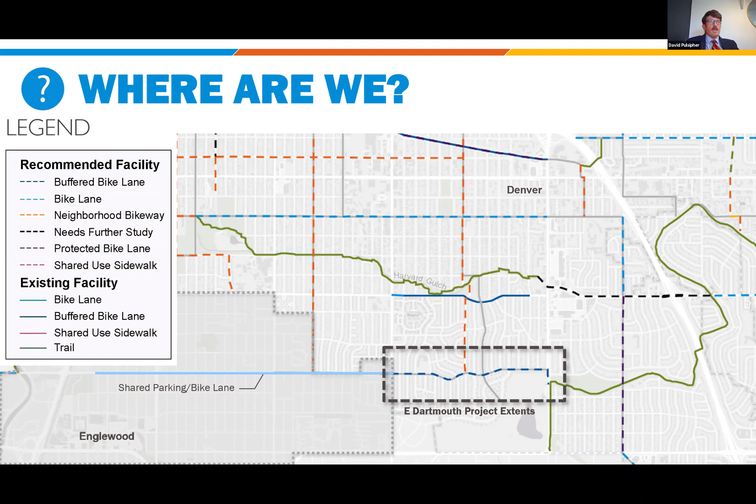Just want to give a little background to where did this project come from. Going back almost 10 years now, this stretch of road was first identified in 2011 in our citywide bicycle master plan effort, Denver Moves Bikes. It was then reconfirmed in 2015 when we did an update to Denver Moves Bicycles. And then some of you hopefully participated in our 3-year comprehensive planning effort called Denveright. In Blueprint Denver, Dartmouth Avenue was confirmed as a bicycle priority corridor. Blueprint Denver is the city's land use and transportation master plan, which was adopted by City Council. And now it is an opportunity to move from just talk to actually something on the ground, with our street maintenance team scheduling Dartmouth to be repaved. Now is the opportunity to design it, to improve it, and make it work better for the city.

A little more background in terms of that's the planning history, and this is how a project becomes an actual design and then implemented. So we've already met and done a lot of planning. We've looked at the data and analysis, and we will walk you through that. We've selected a bikeway type, and now we are refining it and being accountable. Many of you may be wondering why are we here? We met with you guys in February and asked what you think. It's our intent to be accountable, to show you how we listened and how we incorporated your feedback into the final design.

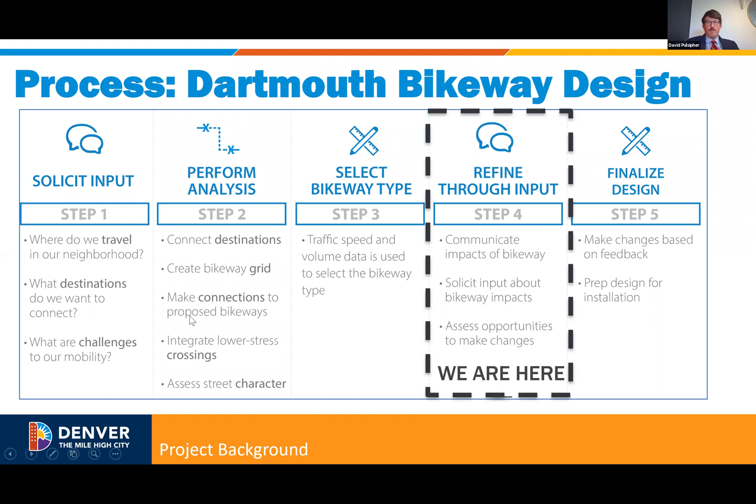So Ashley, this is you. It might help if I unmute myself. Oh, first flub. All right.

With that, we're going to take a quick break and ask you guys a quick polling question just to make sure we're all awake. Outreach is also an ever-evolving field, especially this day and age. So we just want to know what is the most effective way to communicate to you about projects. What was the most effective piece of information you received about this meeting? Was it via flyer? Was it from a neighbor? Did you read about it online? Did you see a yard sign? Or did you hear about it from your council office or your neighborhood organization? Give everyone just a few moments to fill that out.

All right, let's see what the results are. So it looks like, well, not surprising, the majority of folks, 36%, heard about it from their council office or neighborhood organization. I think that's definitely a reflection of how involved both the neighborhood organization and council office, Councilwoman Black, are in this community. So awesome, thank you, that is very helpful, as are the other notes on that. So with that, back to you, David.

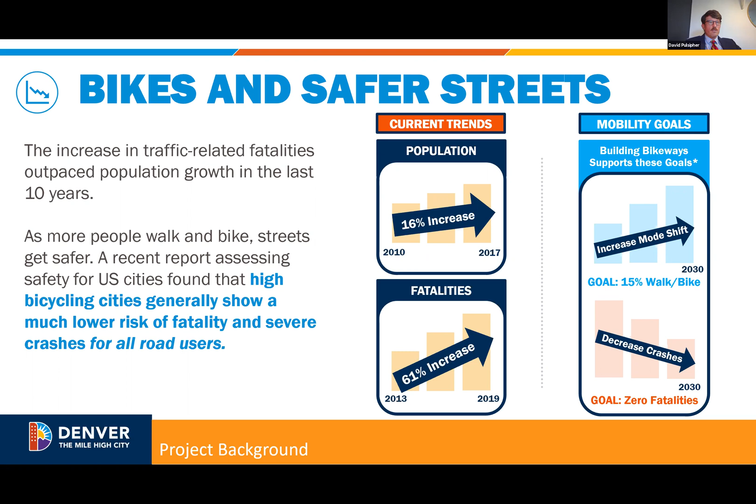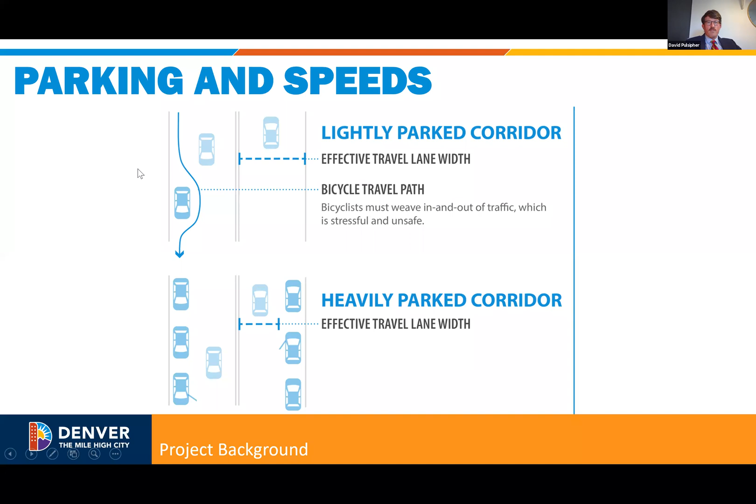So there's a relationship between the design of a road and fatalities and injuries. A good way to think about this is when you're driving on I-25, you may notice the lanes are really wide, and that's to accommodate higher speeds. When you have wider lanes, it accommodates people going faster. In a heavily parked area, that can effectively reduce the width of the lane, but on an infrequently parked road, it makes the lanes operate wider, turning what's intended to be a narrow roadway into a very wide one, which is conducive to speeding. Increased speeds result in increased likelihood of fatalities and injuries to vulnerable road users. So there's definitely a connection between roadway design and safety.

You may have heard about a buffered bike lane, which is the proposed idea. What Denver is trying to do is get more people to ride their bike and make it possible for more people to do so. This data was pushed out by DRCOG, the Denver Regional Council of Governments, who did a statistically valid survey of people living in the Denver metro area. They found that nearly two-thirds of people want to ride their bike and want that opportunity, but don't feel safe doing so presently. When you do things like a normal bike lane or a shared lane marking, you're encouraging people who are already riding to have more mobility. What we're trying to do is design a network that encourages the people who aren't comfortable now, the majority of Denver, to be able to ride their bike.

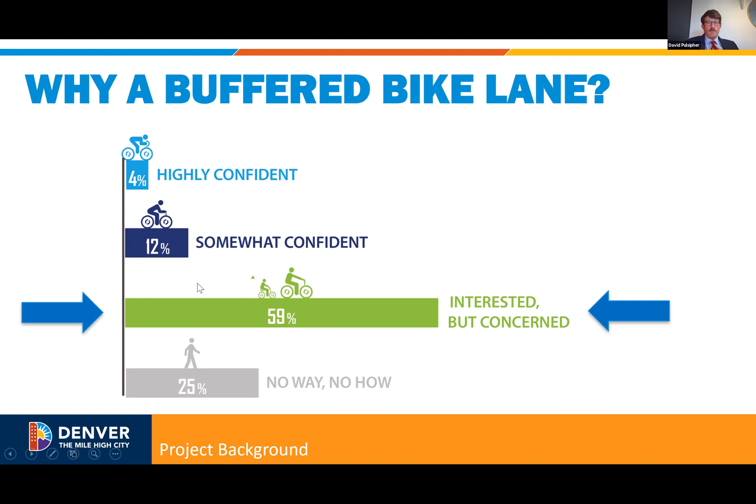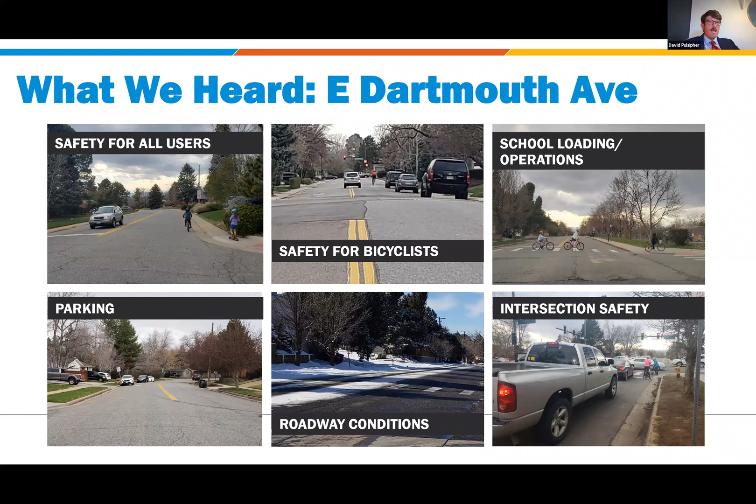So now we're going to talk about how what you said impacted the final design and what we're showing you this evening. This is Bryce—I'm going to hand it over to Bryce, our design lead and transportation engineer at DOTI Engineering. Thank you, David, and hello everyone, thank you for joining us tonight. As David said, my name is Bryce Hammerton. I'm the engineering lead for this project, and I wanted to discuss some of the data and design.

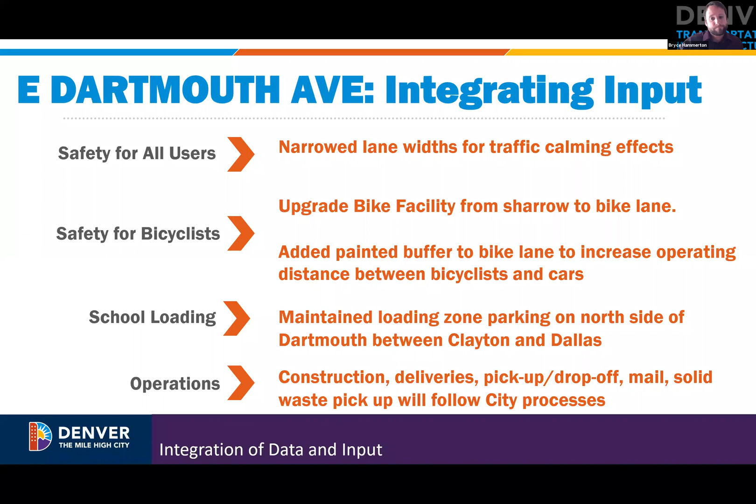Public on-street parking utilization is very low, as we have been told and as the data shows. So we will be removing parking from the street. However, we will work with the community to identify remaining street parking available in the neighborhood.

Roadway conditions: street resurfacing will improve the pavement quality. Intersection safety, particularly at Colorado, will have improved marking and signage to better direct vehicle traffic and bicycle traffic.

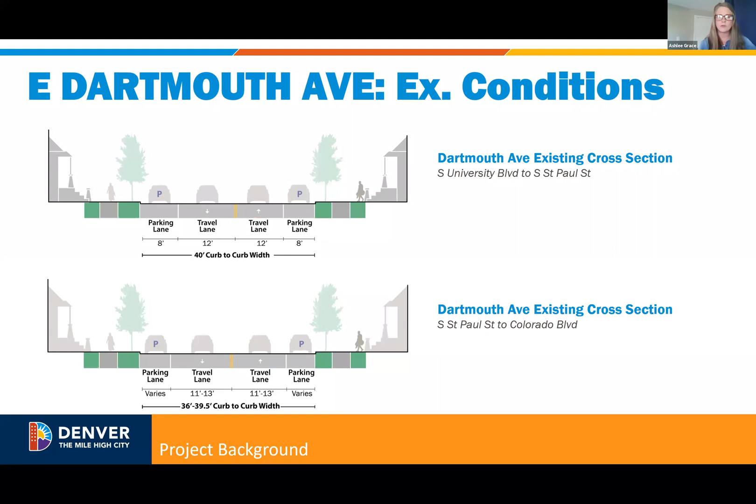Yes, it is measured speeds, not posted speeds. That may surprise some people based on what you feel traffic is, but as the data shows, it is right around 25 miles per hour.

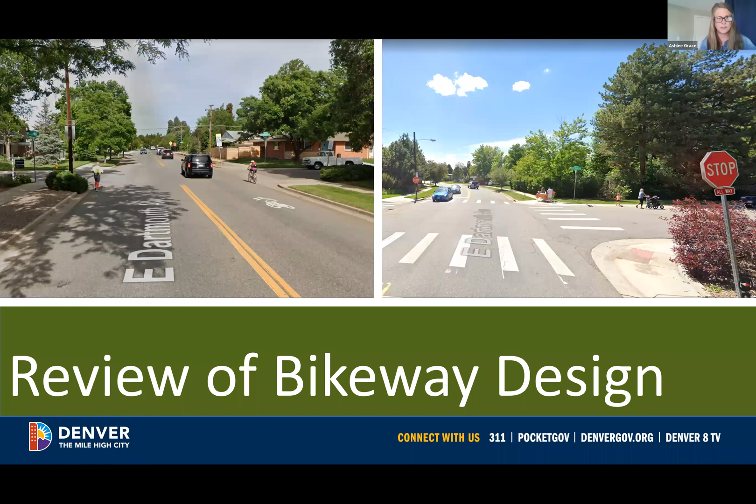Something else to note on that last cross section, and on all of these cross sections, is the 10-foot travel lane. If you remember from the existing cross section, it was 12 feet, so we are narrowing those travel lanes.

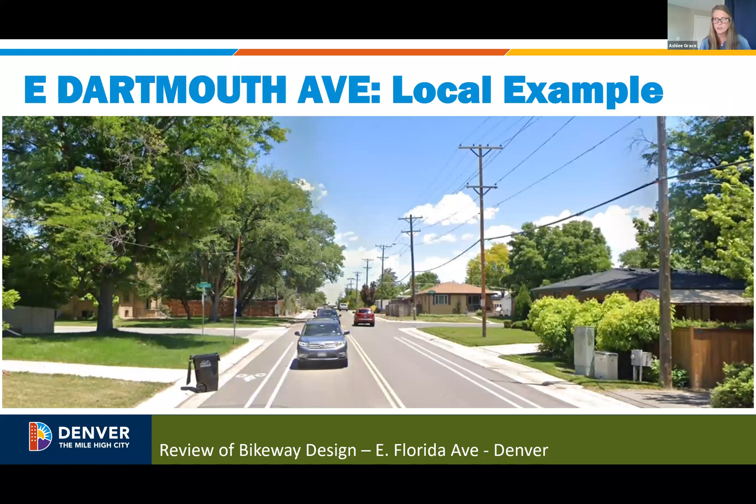All right, let me see, next question. Can we go back to the design of the bike lane at Slavens specifically? Is it only pickup or drop off where people can park there?

Maybe Bryce, do you want to handle that one? Yes, sure, and thank you for your question. That is intended to just be a loading zone, so that will only be during pickup or drop off hours. And then otherwise, there will be no parking.

Okay, great. David, did you have anything to add on that? Yeah, just like any other loading zone throughout the city, that's enforced no parking unless otherwise permitted, during loading zone hours. Great, thank you.

Mark, question for you. Will we be able to get in and out of our garages during construction? So I currently just sent a text to the milling construction group to find out how that would actually affect your access. It will take a couple days to go through and mill, and typically they do one side of the road before doing the other. There will be a time for a small section where the milling machine will be blocking your driveway, but it'll be a short period of time before moving on down the road. Great, thank you for that.

All right, so another question I'm seeing here about traffic calming. What consideration was given to traffic calming, whether it was reducing the speed limit, adding roundabouts, electronic speed monitoring, etc.? Was any of that considered? Why or why not?

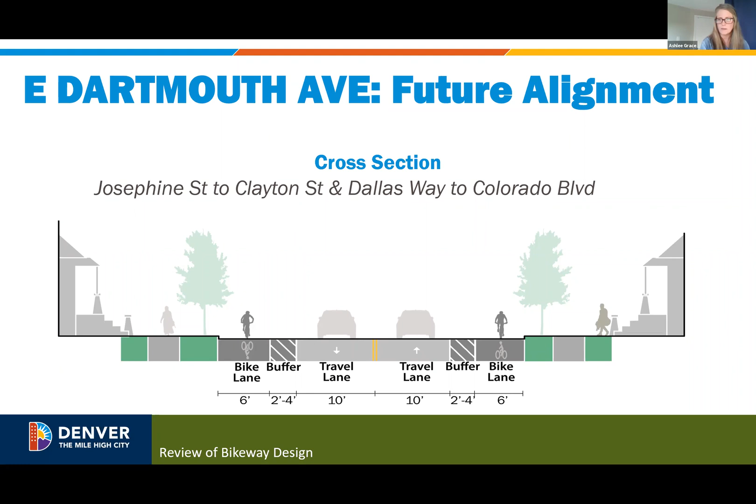One last question, or two last questions, and then we'll wrap up. One is from Jonathan: is there a chance that the sidewalks could be widened?

Let's kick that over to Bryce. Do you want to take that one? Yeah, so similar to what Mark went through earlier with widening the road, as part of this project we were not looking to do that, just based on funding, but that's not ruling anything out in the future. I can add a little bit to that.

Basically the city has three ways to address sidewalk construction. One is sidewalk gaps, and the city views where a sidewalk does not exist as the biggest impediment to pedestrian mobility, so that's a top priority. Second is a sidewalk that exists but is in bad condition. The city has the neighborhood sidewalk repair program, which works with neighborhoods across Denver in about a 10 to 11 year time frame to repair damaged sidewalks.

Third are what we call deficient sidewalks, commonly referred to as Hollywood sidewalks, which are in okay condition but not wide enough for someone pushing a stroller or someone in a wheelchair. It's a really expensive and complicated endeavor, for some of the reasons we mentioned earlier, with respect to ripping out curb, ripping out people's guards, gardens, yards, sprinkler systems, or moving the curb out. It's just a very expensive thing. We don't have a strategy solidified around that effort yet, but we are making progress on sidewalks, focusing on sidewalk gaps and damaged sidewalks.